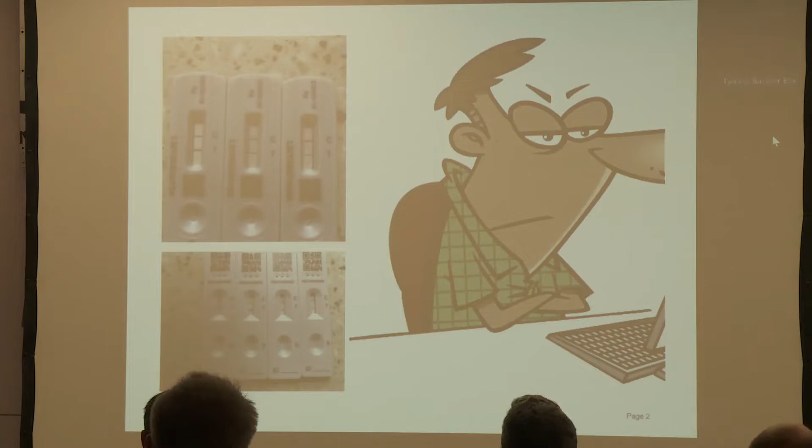Looking at these tests, which I hope you can see, in research you have to have the eye of faith. Looking over the last 7 days, at the bottom right, I'm thinking that the positive line is just looking a little bit thinner. So maybe I'll be negative soon. But anyway, that's probably my eye of faith in this area.

Andy mentioned my connection with ESIS TC4, and also the fact I've been on the executive committee of ESIS for the last 2 excos, which has been a great privilege. But I think one of the things it's given me the opportunity to see is the great work that the technical committees do within ESIS.

Many of the technical committees are fantastic centers of activity and are pushing the science and the application forward in many exciting areas. In terms of TC4, which I co-chair with Andy Brunner...

TC4 is the 4th oldest of the TCs, and in fact it was conceived at ECF5 in Lisbon, Portugal in 1984, and it held its first meeting in October 1985. So this year TC4 is going to be 37 years old.

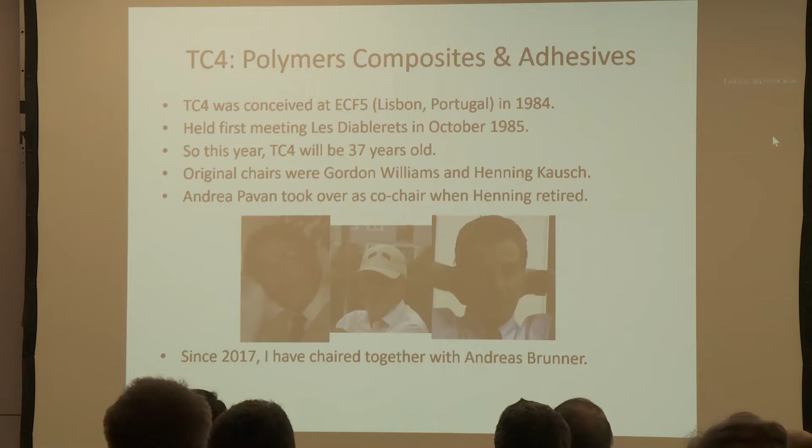I just want to give a quick plug for the areas of activity of TC4. Hopefully TC4 members are influential, but the areas of activity have really been in fracture mechanics test method development for polymers, for composites, and for adhesive joints, and that includes peel. So traditionally and historically it started with K, K for polymers and G for composites, and that was in mode 1 and then mode 2 and mixed mode, and more recently J.

Also areas of activity have been trying to understand the resistance to fatigue loading, to high-speed impact. There's been lots of work on high rate applied to both polymers and also composite materials, and also environmental effects.

At the moment we have a particular focus on new polymeric-based materials. They could be laminates or composites, and also in terms of non-conventional test methods. The committee have been interested in methods like scratch testing and also cutting, where toughness values can be backed out of the test. This gives the opportunity to test various materials which are otherwise very difficult to test from more conventional fracture mechanics methods.

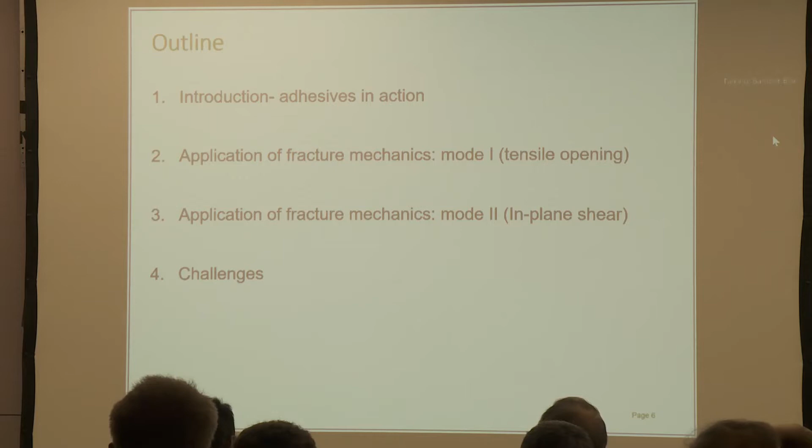So coming to the presentation, I want to talk briefly about why we use adhesives, and then to look at some of the issues that we run into when we're fracture testing structural adhesive joints. I'm going to limit myself to mode 1 and mode 2, but of course mixed mode problems are also prevalent. I won't be discussing mixed mode today, and I'll end with some challenges.

Very quickly, adhesives in action. We can see here that adhesives are used in aerospace and aircraft to a large extent. In fact, adhesives are a very efficient joining solution because you don't have to introduce holes to the structure. There's no need to drill holes for rivets if you're adhesively bonding. So the stresses are nicely uniformly distributed across the two mating surfaces. Adhesives are very useful and successful in joining different materials, so they're a good multi-material joining solution.

The slight disappointment with aircraft is that, due to the fact there's no current successful test for detecting kissing bonds in adhesive joints, adhesives tend to be limited to secondary structures in aircraft. Obviously, that's an active research area.

But looking at the structure, you can see some of the places where adhesives are used. Structural film adhesives, widely used in aerospace, are used here along the wing sections for spoilers. They're also used in the vertical tailplane and horizontal tailplane.

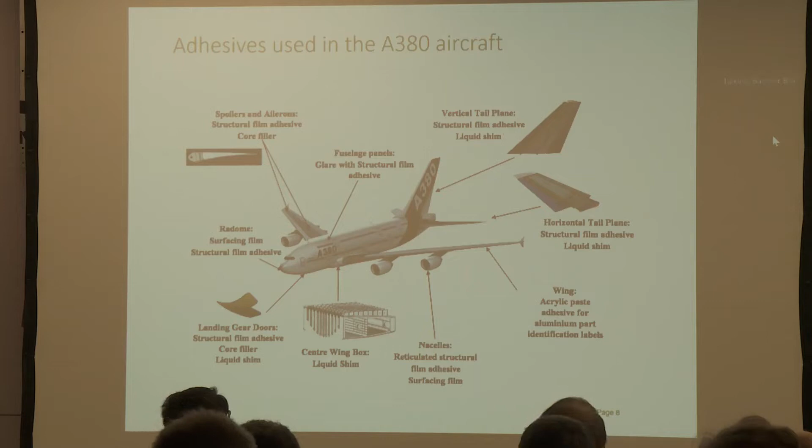So there are many applications structurally around the aircraft where adhesives and toughened adhesives are used. Moving on to the automotive industry, which is also another large user of adhesives.

Several structural epoxy adhesives have been developed which have excellent impact resistance. You can see in the image on the top the orange seams holding parts of that aluminium structure together, which is connected, in that case, to a carbon fiber composite part. The adhesive is positioned and designed to resist impact loading, such that in the event of an impact, the structure will progressively crumple. The adhesive will hold together, ensuring the metalwork deforms, absorbs energy, and absorbs the crash energy of the vehicle collision.

Advantages of adhesives in this sort of application are that, compared to welding, they stiffen the structure and also improve the noise, vibration, and harshness characteristics. They're very good at damping vibrations, so adhesives are very widely used in the automotive industry.

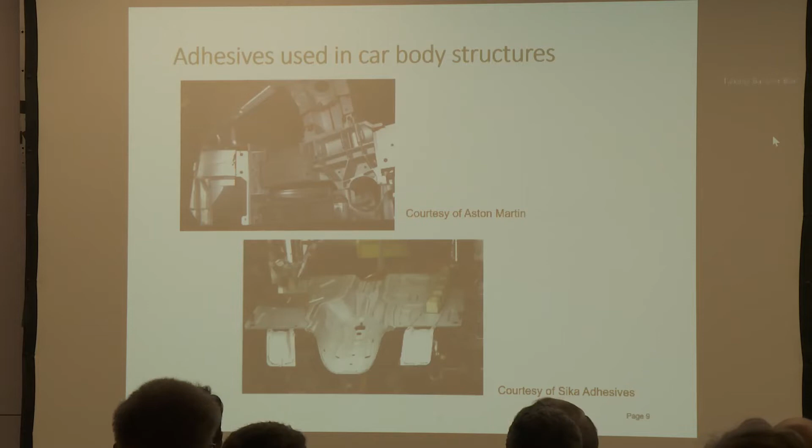But of course, to be able to use adhesives with confidence, we need a fracture mechanics framework. We need to take the different types of loading that form in a structure and, in the classic fracture mechanics way, separate those out into modes 1, 2, and 3.

And of course we can have mode mixes, combinations of those, and we use various different methods to determine these fracture parameters, G1C, 2C, and JC, for example. Those are the ones I'm going to be talking about in the talk this morning.

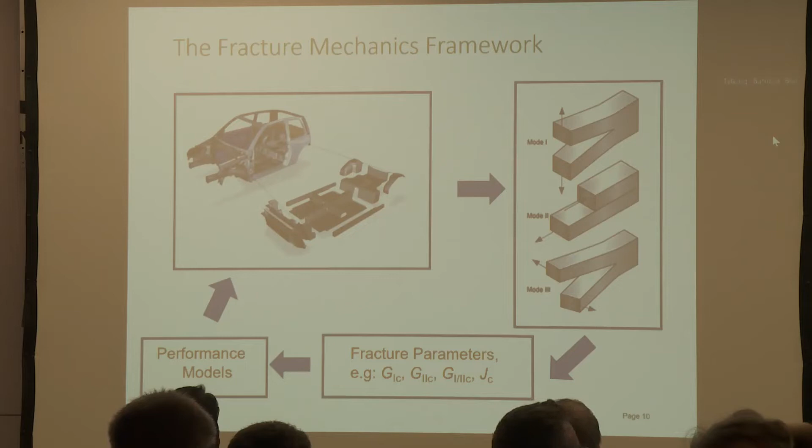Of course, they would then feed into performance models so that we could understand better how the structure behaves, and for example how long the structure may last. So the service lifetime would also require these parameters.

Moving now to the application of fracture mechanics to adhesive joints, certainly in terms of the mode 1 tensile opening methods, following on the pioneering work of Griffith and Irwin, Ripling, Mostovoy, Patrick, and Crosley in the 1960s developed two very successful structural adhesive test geometries: the DCB and the TDCB. They were very popular, and based upon those two geometries, an ASTM standard was published.

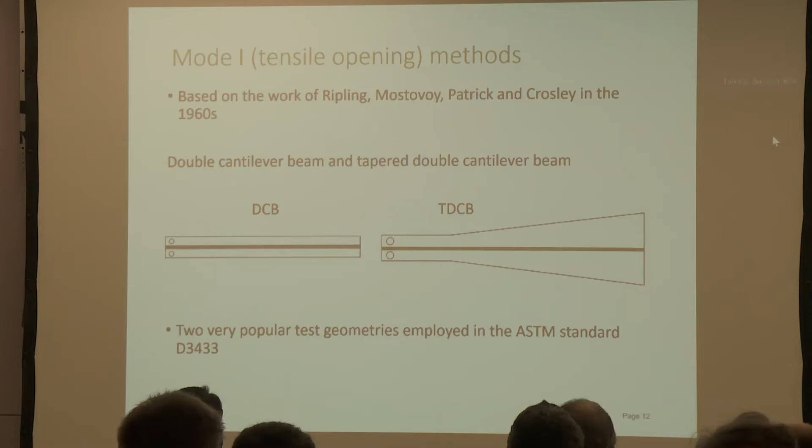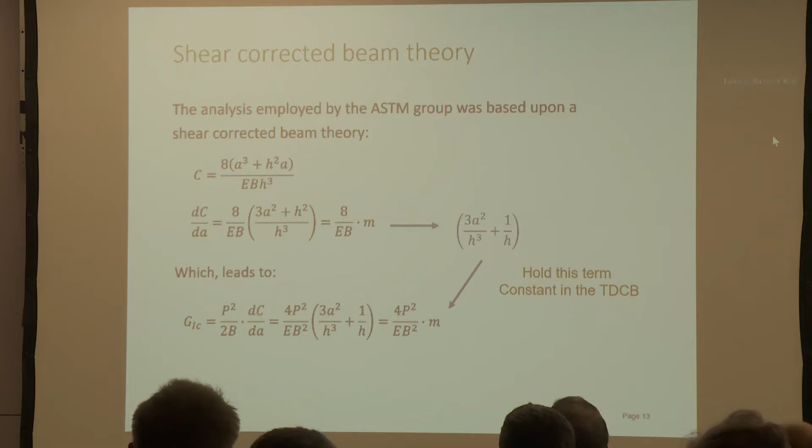The tapered double cantilever beam will be designed with a constant value of M. Of course, the actual geometry will vary as M changes, but typically you can use a value of M to hold the rate of change of compliance constant, and there are great advantages for doing that.

So when we revisited this very popular ASTM test method, we looked at two issues in this test. The first issue was that the contoured part of the beam, that part which is tapered such that M is held constant, doesn't extend for the whole length of the beam, but is discontinuous. And you can see that leads to a compliance error in the early part of the beam.

So the straight flat part of the beam, which extends x0 from the load line, basically has a different compliance characteristic to the rest of the beam. So that needed to be recognized.

You can see that if one extrapolates the linear changing compliance to zero compliance, you actually get an intercept at some portion of the untapered region, x0. It turns out to be 2/3 of the length. But that's a compliance error you run into if you assume the beam profiles down to zero crack length.

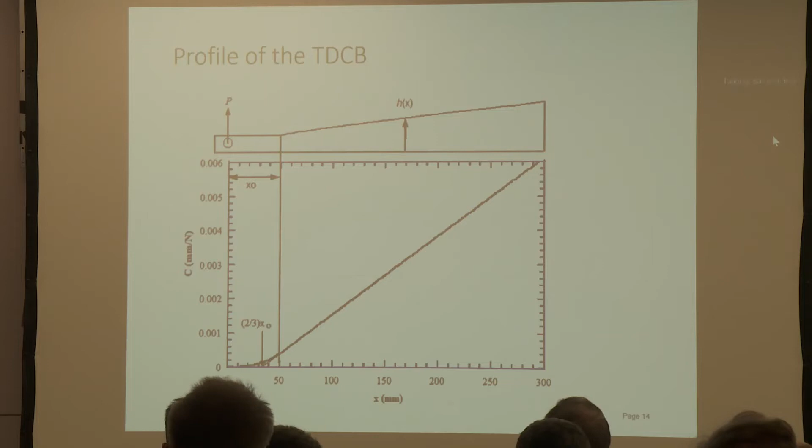The second thing that needed to be looked at was the root rotation. The original shear-corrected beam theory didn't take the root rotation term into account, which has important consequences. If one looks at the compliance against crack length using, for example, the original simple beam theory, there was both an error in slope and an error in intercept based upon the original analysis.

When we were developing the ISO standard for mode 1, we took those two terms into account, and we ran a series of round robins within the ESIS TC4 group to look at that effect and to work out the accuracy and reproducibility. But that solution for the tapered double cantilever beam was successful.

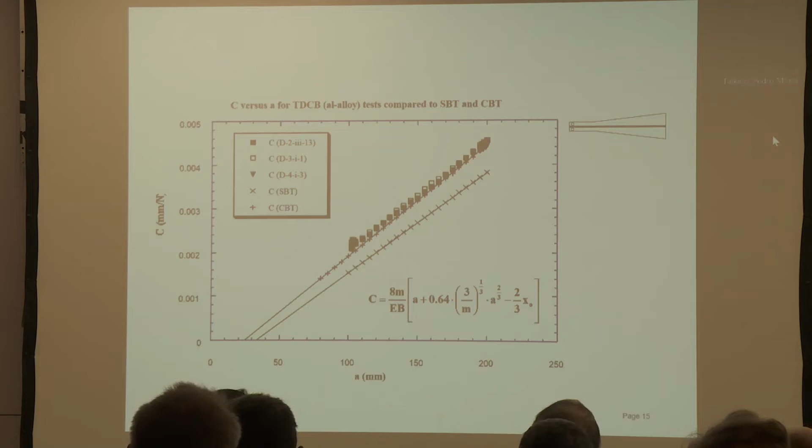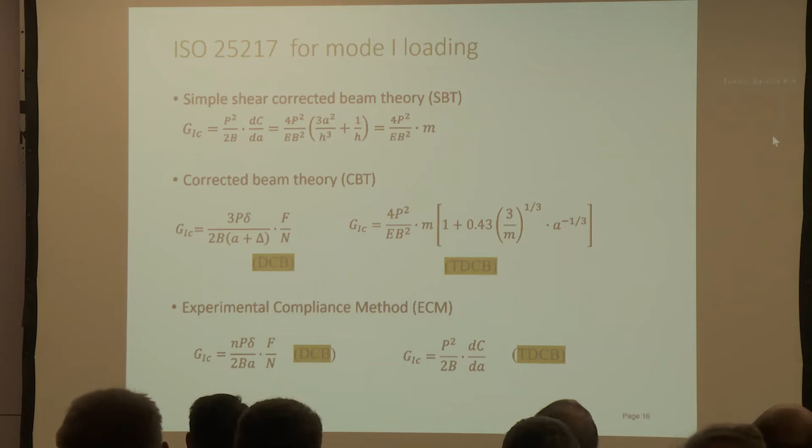So in the ISO we were developing, we implemented corrected beam theory, which included the root rotation term and corrections for large beam deflection and end block stiffening, and also the corrections I just mentioned to the tapered double cantilever beam. We implemented a simple shear-corrected beam theory, a corrected beam theory, and an experimental compliance method.

In terms of fracture resistance, those methods and determination of G via the three methods work well. One thing we wanted to explore additionally was the use of an effective crack length approach.

In addition to the three methods, introducing the corrected beam theory with effective crack length, CBTE, the idea is that the use of effective crack lengths can negate the need to measure crack length. So there are situations, a little bit like with the tapered double cantilever beam, where you can negate the need to measure crack length using effective crack length approaches.

Various groups have implemented different versions of the CBTE method, and I'll return to those in a little while because obviously they can also be used in mode 2. But this is a fracture test specimen.

You can see the adhesive on the right, and this is a structural film adhesive, the sort that may well have been used in an aircraft application. You can see that we generate an R curve. The methods are in broad agreement in this case, and we've got a fully cohesive fracture surface, so there are no aspects of interfacial failure in what we're looking at.

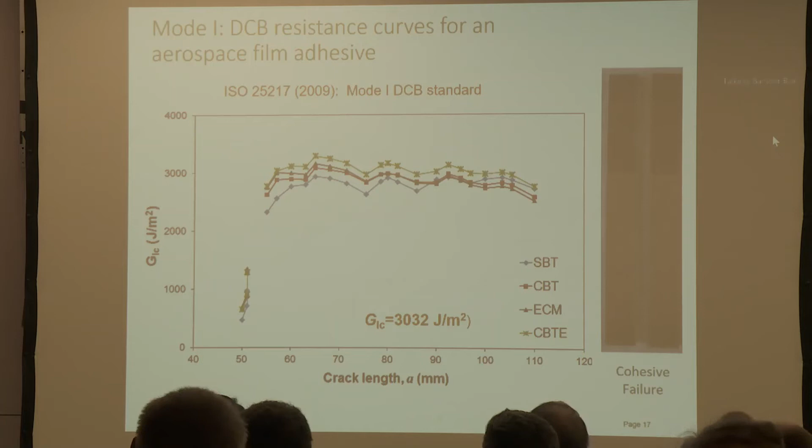Great progress has been made in toughening adhesives, and many groups around the world have implemented different toughening approaches—rubber, core shells, small core shells, nanoparticles, and combinations thereof. Very impressive results have been achieved, with large increases in toughness achieved by different groups.

So there's a testing challenge here, and that's the validity of these methods when the materials become very tough. To what extent are the methods I've talked about valid when adhesives become extremely tough and/or ductile?

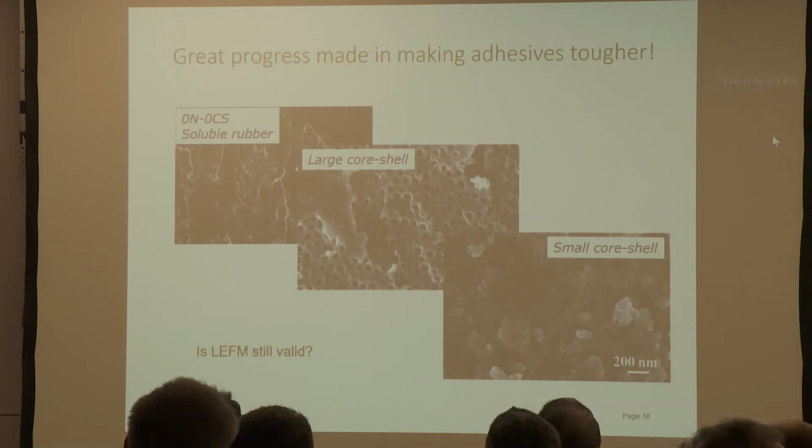DIC, digital image correlation techniques, have become very popular in the last 10 years, and many groups are using DIC. Not only can you look at the strain fields, but you can use DIC to inspect displacements and rotations on a system. It's a very versatile technique, one that we've used quite widely.

What you can do with, for example, a double cantilever beam with a bonded adhesive layer, is set up inspection points on the surface of the specimen. Then you can take high resolution digital images and process those with DIC analysis software to extract the displacement points.

One of the advantages of this technique is that it can be automated. Particularly thinking of mode 2, where it's very difficult to measure crack length, but often in mode 1 we also have significant issues measuring crack lengths. So techniques which have the potential to automate crack length measurement are very desirable.

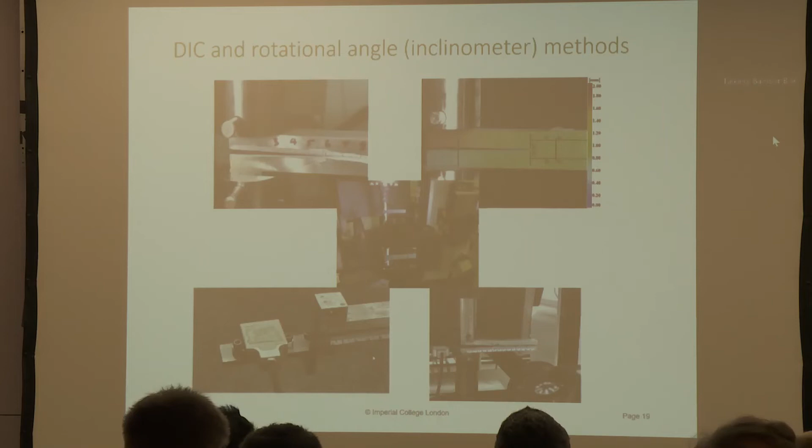So there are techniques where we can measure the displacements, both behind and in front of the crack tip, and also the rotation angles. This is a powerful approach because we can achieve several things simultaneously.

One of the things we looked at was, from the DIC data, the displacement profiles ahead of the crack tip. This enables us to do this with quite a high degree of accuracy using DIC. We're able to measure the displacement profile ahead of the macroscopic crack tip, and that's shown by the red line in the data.

And of course, one thinks about the traction separation law additionally. One of the things we wanted to do is define as accurately as we can the effective crack length. As I mentioned earlier, effective crack lengths have an advantage, and if we can come up with routines for automating their measurement, then we can implement those effectively in the analysis solutions.

If we're looking at a diagram here, you can see that the region O to A is typically representative of damage ahead of the crack tip. The region A to B is the elastic tension region. Then for the sort of materials we're looking at, bonded joints, we have a compressive region.

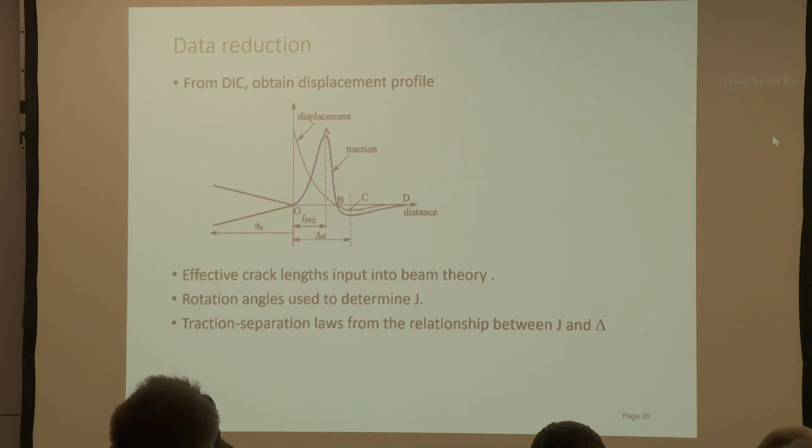With the DIC, we can track the values of effective crack length, which we can feed into the beam theory. We can track rotational angles, either using the DIC method or using inclinometers - that's been done by several other groups. And then we can measure traction separation laws, doing that simultaneously while measuring J for the adhesive.

So this is some data for one particular adhesive - an epoxy paste adhesive - where we've used digital image correlation and developed the relationship between J and the displacement delta, in this case the opening displacement term, using different schemes for controlling that relationship. Then we can determine the traction separation law. We can think of the direct differentiation of the J-displacement function as being like the experimental value.

Then we can apply different techniques to simplify that. This is quite an interesting approach - I know many groups are using DIC and extracting traction separation laws and J simultaneously in this way.

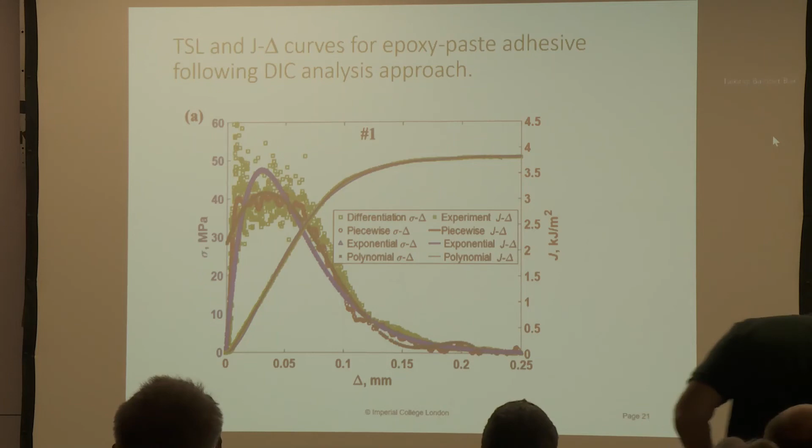In terms of what it means for the adhesive, we can compare G values via different techniques: simple beam theory, corrected beam theory, and different effective crack length approaches. We can do that for different adhesives.

On the left, we're looking at a tough adhesive - this is a SikaPower 497, an automotive adhesive, highly toughened and crash resistant. We can see that the methods are giving us pretty good agreement; the plateau value of J and G via the different techniques are quite closely correlated.

However, for the more ductile adhesives, you begin to see differences, and it becomes more challenging for LEFM methods, even with the corrected beam theory and the effective crack length approach, to give agreement with the J values.

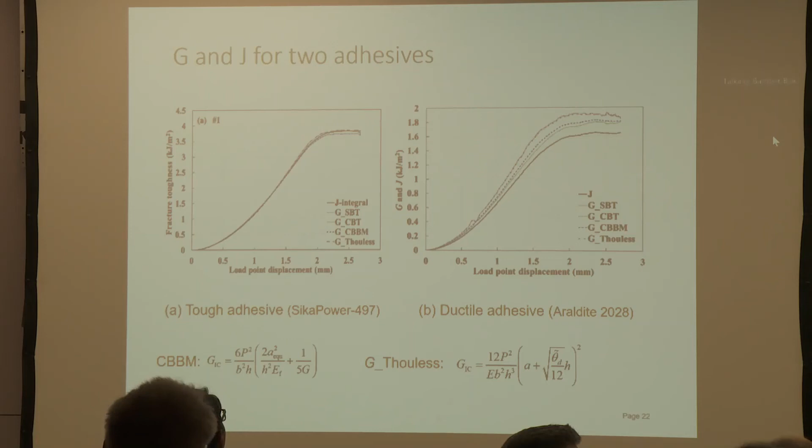So I want to end by saying a few things about Mode 2, which is currently a big work activity area for ESIS TC4 and for myself at Imperial.

We know there are different ways of introducing Mode 2, and this is one of the challenges. Whilst there was general agreement on how to perform a Mode 1 experiment, there are widely different ways of introducing Mode 2 to a specimen, from 3-point flexure to 4-point flexure to tapered end-notch flexure to, for example, an end-loaded shear joint.

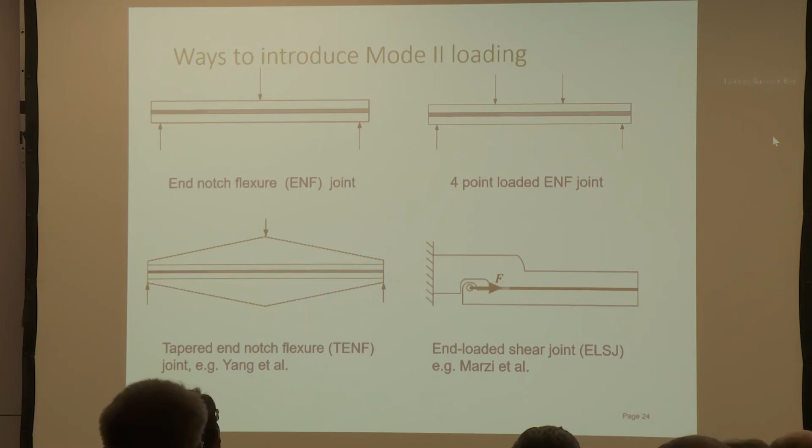Different workers have used different ways of doing this, and at Imperial and in the ESIS TC4 committee, we've used the end-loaded split. This is a specimen which is clamped as a cantilever, and the clamp is based upon a linear bearing trolley, and then the specimen is bent, and that introduces a state of pure shear at the crack tip.

And of course, what then happens? Well, as you deflect the beam, you impose the shear stresses at the crack tip.

And if the adhesive is a toughened, highly toughened adhesive, as are many of the adhesives that are of interest, then we have an extensive fracture process zone develops. And this can be really quite extensive in Mode 2.

In addition to plasticity, for example, one can also see a micro-cracked region, depending upon the precise details of the adhesive, the balance between the toughness and the ductility. You can get a micro-cracked region.

This obviously poses a number of challenges, one of which is a fundamental challenge to say, is this genuinely Mode 2 fracture? So Kevin O'Brien from NASA Langley wrote a very nice article many years ago saying, is this process shear measurement or sheer myth? And he was referring there specifically to composites, but of course the same can be argued for adhesive joints.

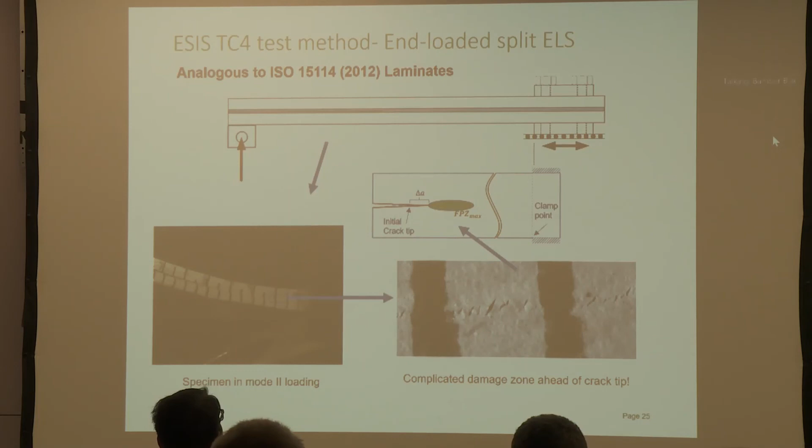So what one school of thought says, don't go here, measure Mode 1, and that's all designers need to know. And another school of thought, which is closer, I think, to where I stand, is that this is a real phenomena, and the combined response of all of these Mode 1 micro cracks, if you like, leads to additional energy dissipation, which we need to know about. If we're interested in conservative designs, then we want to be able to take this into account and measure it reliably.

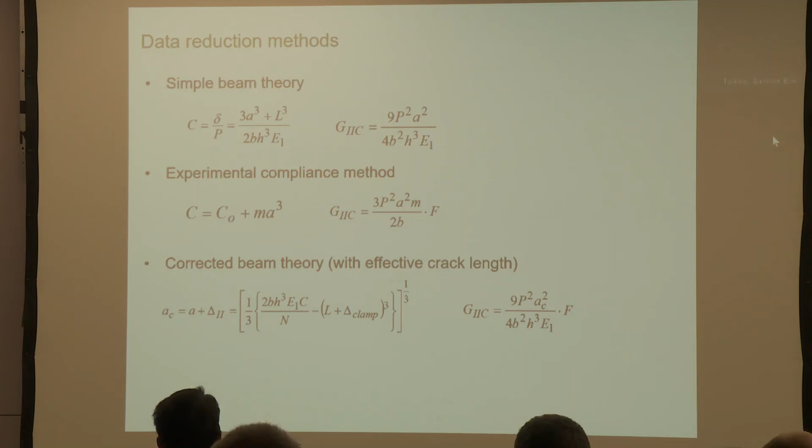So, of course, one can go through a similar sort of procedure. One can apply simple beam theory and experimental compliance methods. One can develop effective crack length approaches. So all of these things can be done a little bit analogous to the Mode 1, and one can look at how they improve the compliance to the crack length variability, the relation.

And one thing we can see here is that because we have a clamp in the experiment, we do have to calibrate that clamp out. But indeed, we can get a theoretical compliance which looks pretty close to the experimentally measured one.

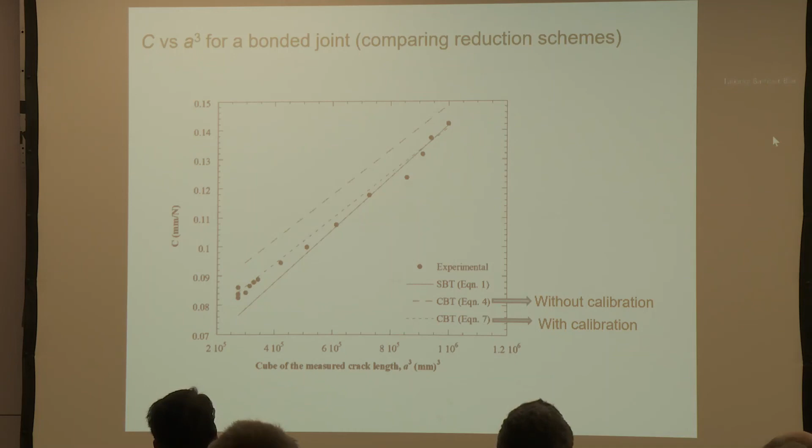But what I would say about this is the method, and certainly the G analysis with effective crack length approach, I think has passed the limits of its validity.

So one can of course inspect this by measuring J, and we've been doing this, and I know labs in various universities have been using techniques to measure J. And what we do find is that when we do this for this particular adhesive, then the J values are lower.

So it would seem that if one is trying to develop a standard for Mode 2, then if one wants it to be able to cover a complete toughness range, then most likely it has to be a standard involving J. Whereas if one is content only to go to an intermediate value of toughness, then G with effective crack lengths would be sufficient.

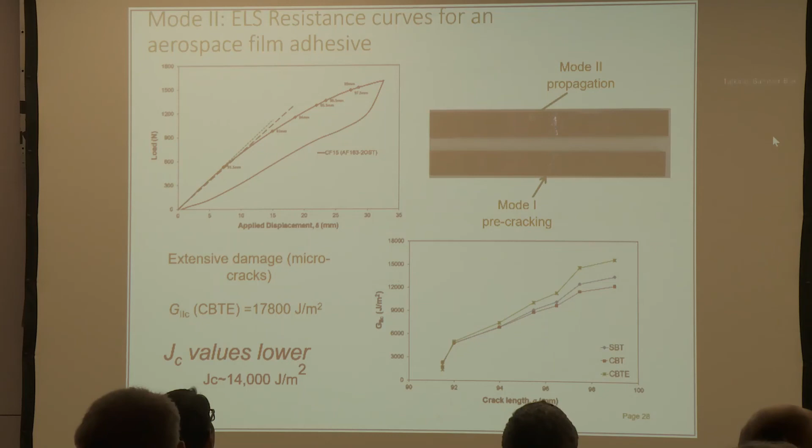But this is clearly an activity area that we're working on. I know different groups are working on around Europe and across the world.

So I want to end just with some thought of challenges that we face. Certainly the challenges with adhesives and characterizing their fracture resistance becomes more challenging as they become tougher. And Mode 2 does pose us additional challenges, not only in how to test and to measure, but also fundamentally whether this is fundamentally the correct approach to be taking, whether Mode 2 really means anything.

As I said, I'm in the camp where I think we should measure it, and we should be aware of the energy dissipation so that we can use it in design. But I'm fully aware of many counter views on that.

And of course, we're interested in characterizing under different types of loading. So current big areas are dynamic fatigue, impact, different environments, of course, hot and cold, and wet and corrosive. They all remain challenging. So I just want to end, please join us in TC4 to work on these exciting challenges. And Andy, I'll hold it at that.